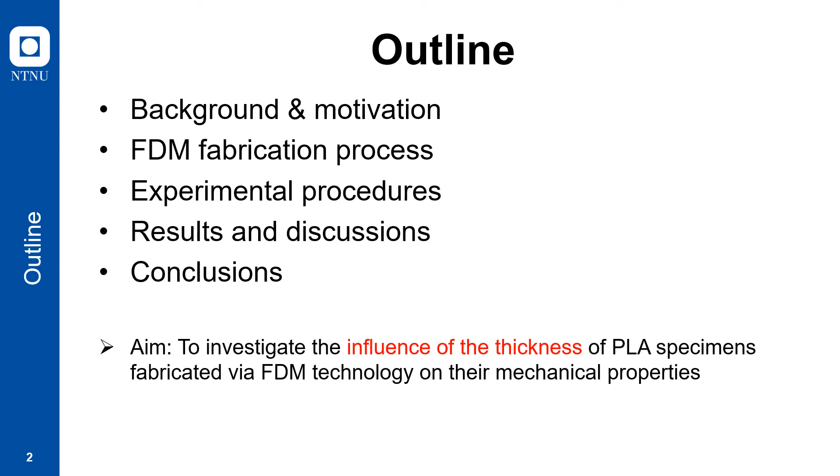So this is the outline for this presentation. First, I will be talking about background and motivation of this research. And then I will be talking about the FDM fabrication process for the specimens we have prepared, and then some experimental procedures and results and discussions, and finally conclusions. So the aim for this research is to investigate the influence of thickness of PLA specimens fabricated via FDM technology on the mechanical properties.

Okay, let's talk a bit about the background of FDM. So fused deposition modeling, which is FDM for short, is one of the most widely used additive manufacturing processes in the world. It's a rapid prototyping process that can fabricate physical models generated from CAD automatically without any tooling or fixtures. And also FDM is one of the extrusion technologies for 3D printing. And as you can see from this image here, it has a lot of applications, and it consists of a lot of components regarding environment, filament, hardware, and software.

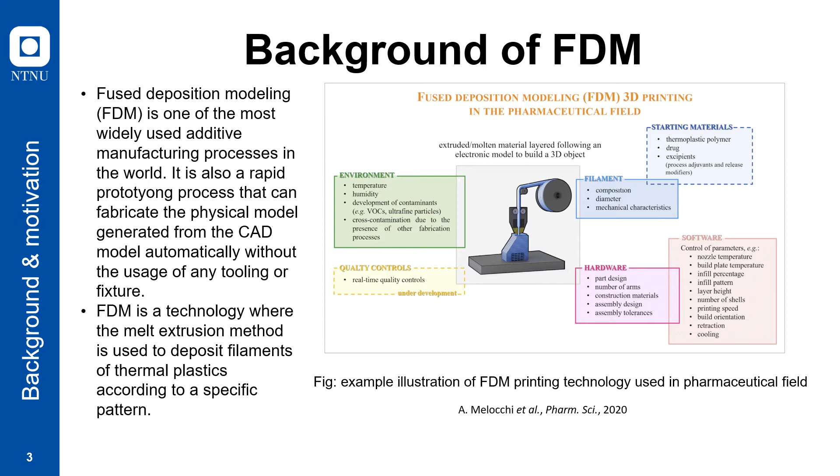And the motivation for this research is to study the geometry and thickness effect of the FDM printed parts. So based on the literature review, the geometry and thickness of the components can have a very direct influence on the distribution. For example, because of the internal porosities, surface quality, geometrical accuracy, and the residual stresses, which can result in variations of mechanical properties with input geometry. So therefore, it is very important to understand the link between the mechanical property of these components and their geometry and thickness to see whether we can improve the design technique or some applications.

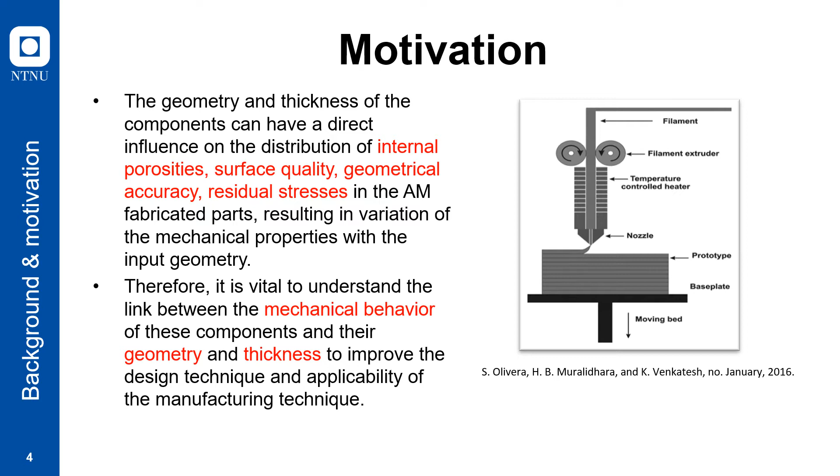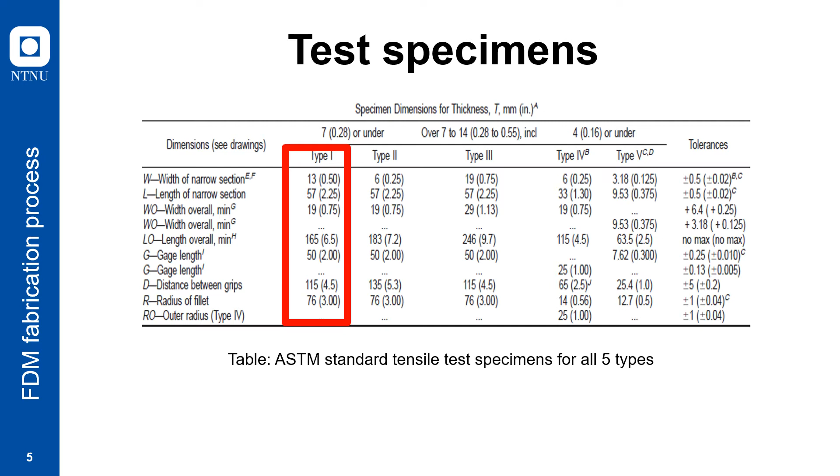So these are the standard dimensions for the test specimens we have chosen. We use the ASTM standard, and we have selected type 1, which has a list of all the dimensions here, as you can see. And this is the fabrication process. For the 3D printer, we have chosen Prusa i3 MK3. It's a very good printer, has a very high resolution. And the filament, we have chosen 3DNet with the natural color and the 1.75 diameter. And the slicing software we have chosen is the Ultimaker Cura.

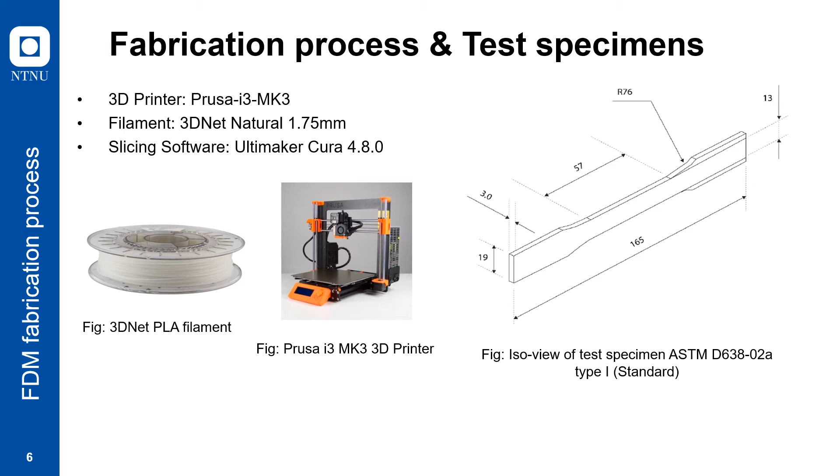And this is the dimensions for the specimen we have chosen, and this is the standard one. As you can see, we have the thickness of 3 millimeters. So in this test, we have 1 millimeter, 3 millimeter, 5 millimeter, and 10 millimeter for thickness. Okay, so these are the fabrication parameters and the process parameters here. So as I mentioned earlier, we have 4 different thicknesses for the specimen, and these are the cross-sectional area and the gauge length for each specimen.

And these are the process parameters we have used to fabricate those specimens. We have made some trials and errors to be able to fabricate those, 100% of the infill density, and with the 0.1 relatively smaller layer height to be able to get a good quality specimen. So these are the parameters we have used.

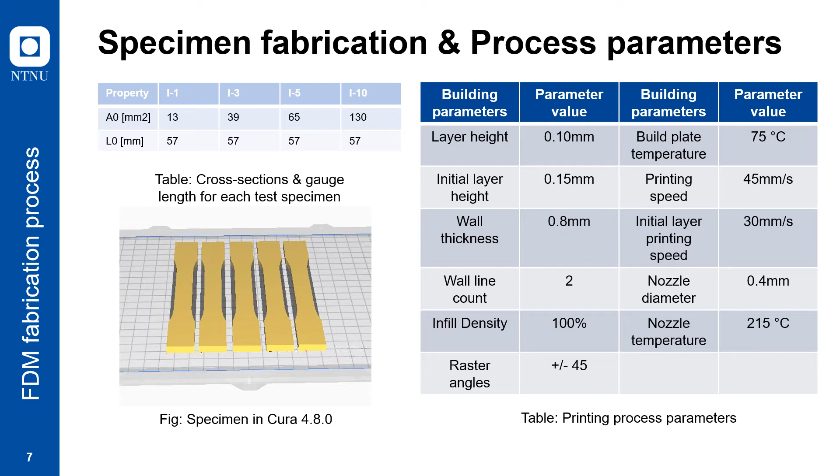And this is the testing machine we have used. So it's called MTS Tensile Test Machine Model 42, and it has the maximum load capacity of 5 kilonewton, and this is very suitable for doing the uniaxial tensile test. And the sampling rate is 10 Hertz, which means we're recording 10 data per second. And the tension rate for this test, we have selected 2 millimeter per minute for the PLA, and the fracture surfaces were also examined with a microscope.

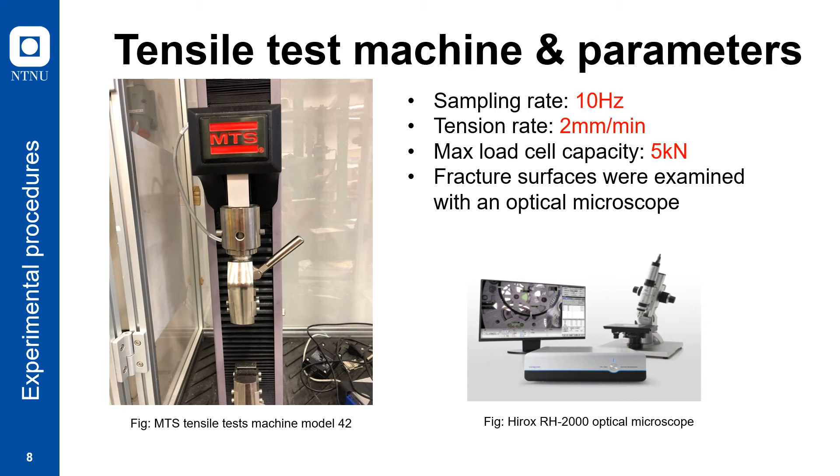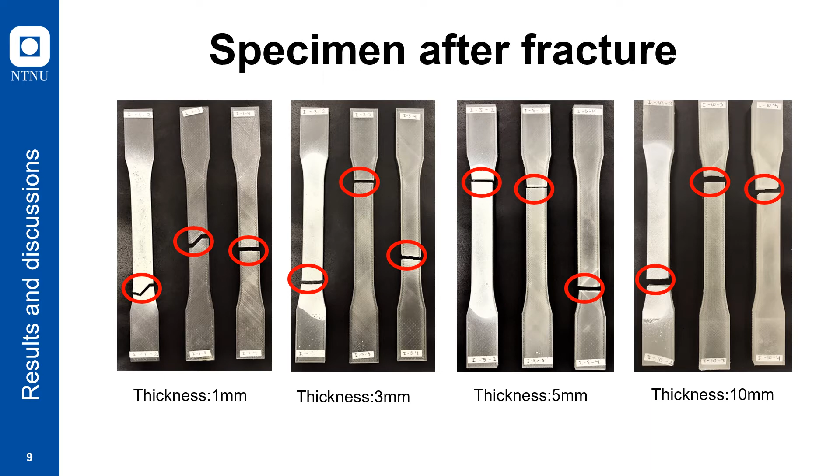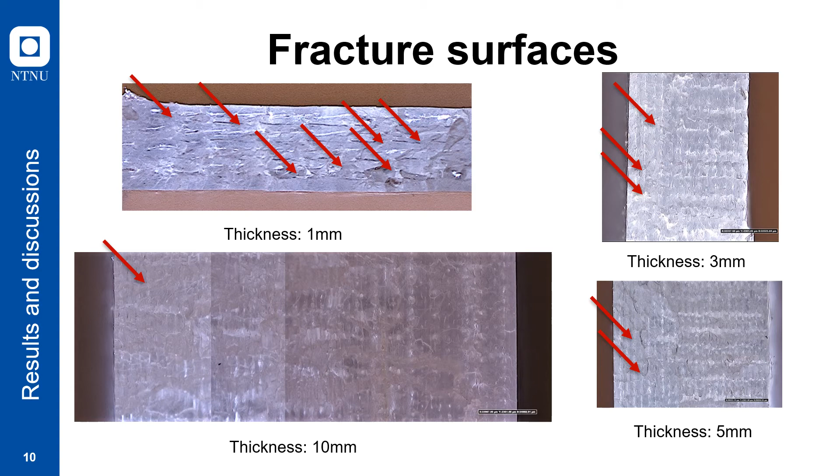So we also used digital image correlation, DIC for short, for analysis. For subset, we used 29. The subset means the area of the dots which was being tracked by the software for DIC. The larger the number, the larger area it has, but it also has larger uncertainty as well.

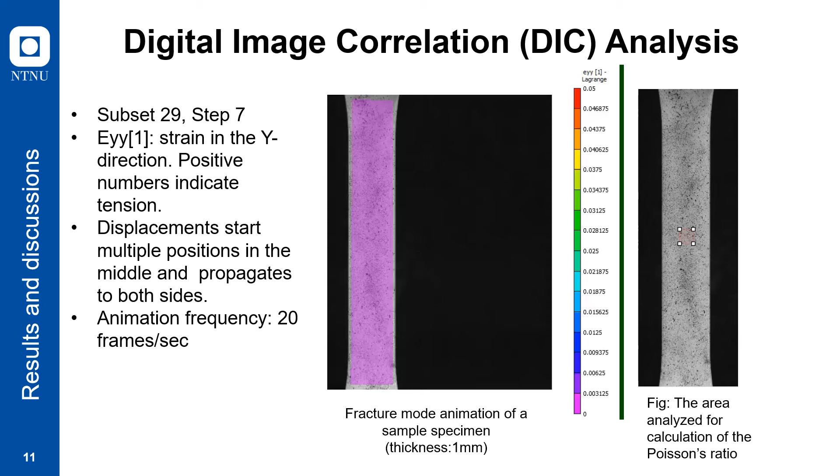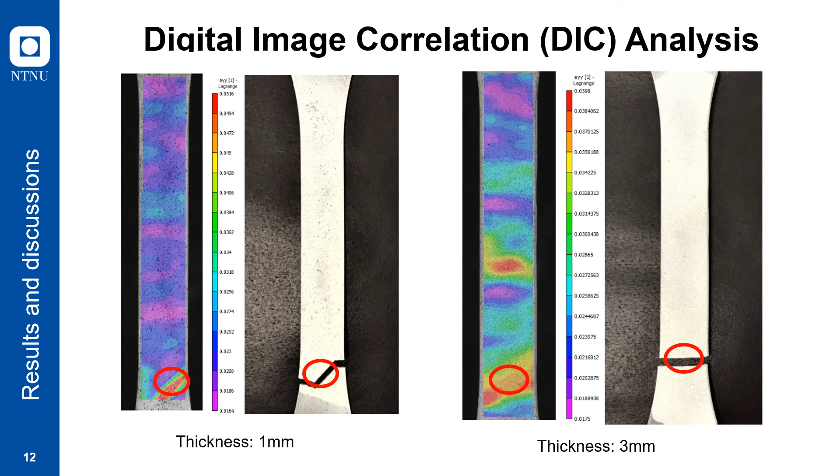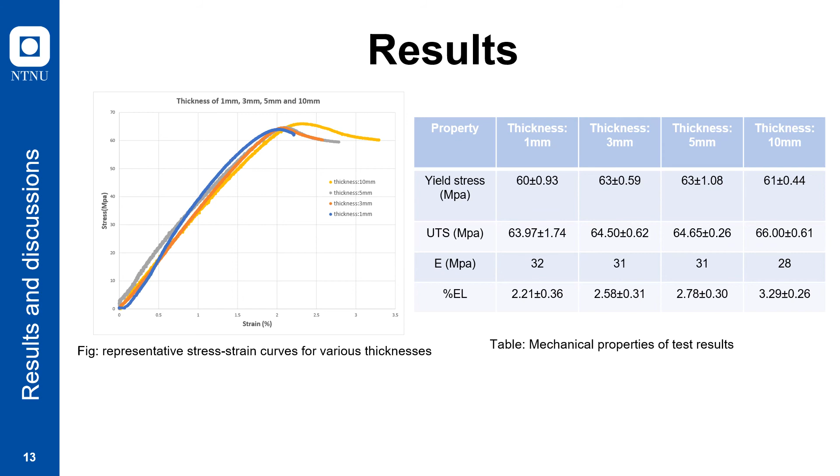And from that, we can get some conclusions. First, there is a high degree of association between the tensile properties and thickness. In detail, specimens with larger building thickness experience both higher tensile strength and larger elongation at failure due to possible reasons. First, layer quality, because for 3D printing, especially for FDM, the first layer is really important to print and to optimize, and sometimes it can be affected by many other factors. So there's uncertainty in first layer quality.

Next, a higher number of layers can result in a higher temperature gradient in the layers, which can also lead to an increase in the diffusion process between adjacent rasters. This will result in decreasing the void ratio and improving the strength of the bond, which will improve the ultimate tensile strength as the thickness increases.

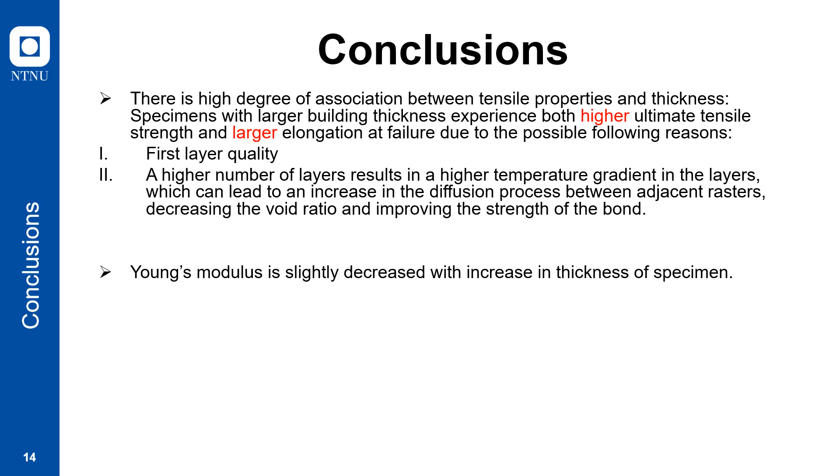And second, as you can see from the table I showed earlier, Young's modulus slightly decreased with the increase of the thickness. And there's a possibility that the specimens tend to have fewer defects and voids per unit volume when thickness increases, according to the image. For detail, we still need to do the voids and defects analysis of the fracture surface to confirm this hypothesis.

And the standard deviation of the mechanical properties has a tendency to decrease when the thickness increases. So there's less discrepancy in the data, due to the possible reason that uneven temperature distribution on the building plate will have less influence. Because for the specimen fabrication, we have 5 specimens for each case, and we fabricated 5 of them on the same plate, so there might be some uneven temperature distribution on the plate that may cause the discrepancy of the data. And when the thickness increases, the influence of that gets smaller.